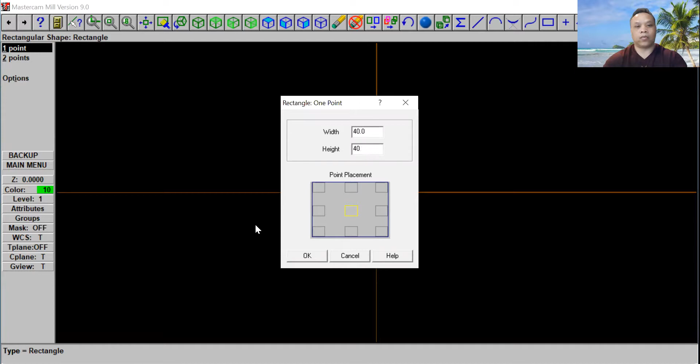We're going to go to origin and click that, then click escape and Alt F1. Put the screen in the middle and go ahead and click F2. Minimize the screen. Now let's go back to main menu.

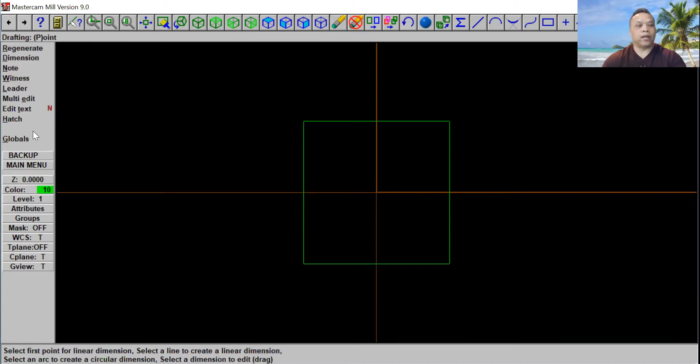Now this time we're going to go ahead and click on create. We're going to click on drafting. Now this is what I'm talking about, the witness. We're going to click on that.

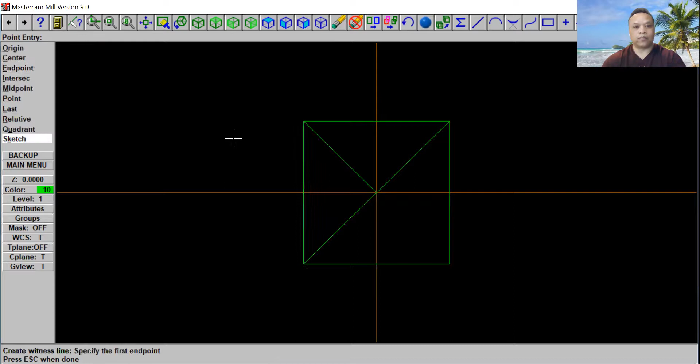Then we're going to go to origin. Click on origin in the middle right here, then click to the endpoint right here. We're going to go back to origin again and click on this endpoint again. Go back and do all four corners. That's 3 and that's 4.

Click escape. Now we're going to use the parallel line, and then we're going to do a box right here, side to side, top and bottom.

Now let's go back to the main menu and go ahead and click on create. This time we're going to use line, click on line, and then we're going to use parallel, and then we're going to use the side distance. So we're going to go ahead and click on side distance.

Go ahead and come over here and click on this line right here, and then you're going to go forward. You're going to go to the right, click on it. I'm going to put 5 inches on there. All 5 inches, all four corners.

Go ahead and click on that. I'm going to click this one right here and click down, click enter again. All 5 inches even out. From this line right here, go to the left and click enter.

Now, if you have a different side that you want to make, you go ahead and put a different dimension there. But for right now, I'm going to use 5 inches all around. So I'm going to click right here and go up 5 inches. I'm going to click enter. Now I'm going to click escape.

Now we're going to delete some of the lines here. So now we're going to go back to main menu. We're going to click on create. We're going to click on drafting.

We're going to click on right here with this line again. We're going to click on origin. Right here, we're going to connect this line right here to this endpoint. We're going to do that on all four corners again.

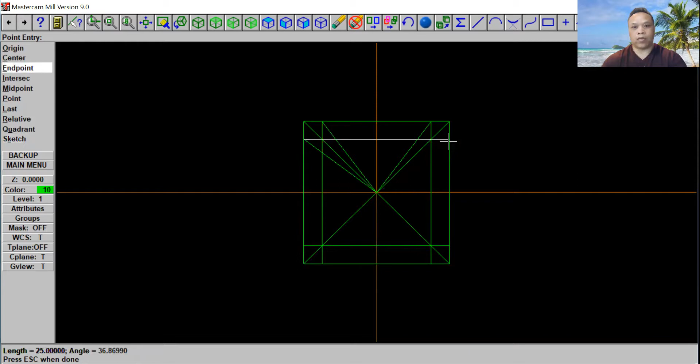Okay guys, this one right here, click to this endpoint, back to origin, and this endpoint here. Again, go back to endpoint, origin, go back to endpoint. Now we got all those lines that we needed.

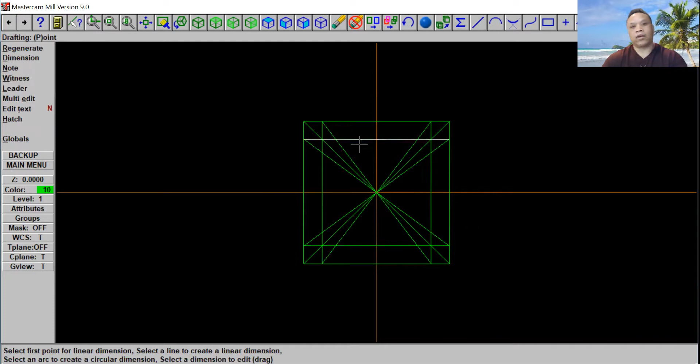Now we're going to get rid of the line. We're going to go here and delete. We're going to delete this line here. Now on this warning right here, it says warning right here. So you want to keep the line that you need, and you want to delete the line you don't need.

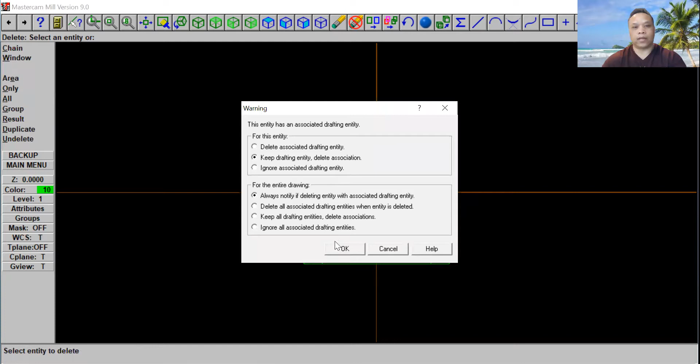Right here it says keep drafting entity and delete association. We're going to click on that, and we're going to click OK. So now I click on delete this line right here, and we're going to click OK. We're going to click delete here, click OK. We're going to delete this middle line here, and this middle line here, and this line here, and click OK.

So then we have all these four directions. Now we're gonna run a pocket through this line right here. But before we do that, we cannot just run a pocket through that. We gotta break this line.

Before we run a pocket, we gotta break the line. Let's go back to main menu, go to Modify, and then we're gonna break the line.

So right here, we're gonna click on draft line. We're gonna break that. Click on that: 1, 2, 3, 4, 5, 6, 7, 8. Now we're all done. Go ahead and click done.

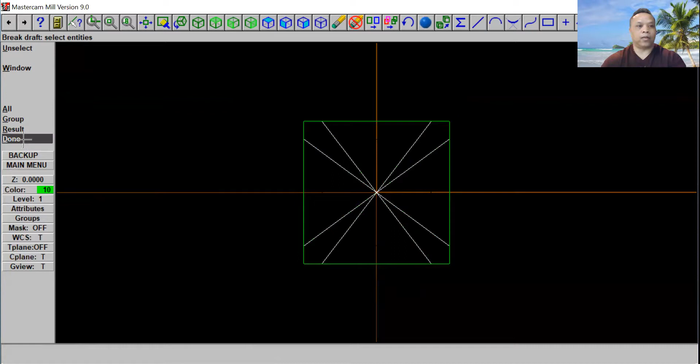Now we're gonna go back to main menu and run a pocket, a tool through this line, this pocket here. Go to Toolpaths, and click on Pocket. We're gonna click right here, inside this right here.

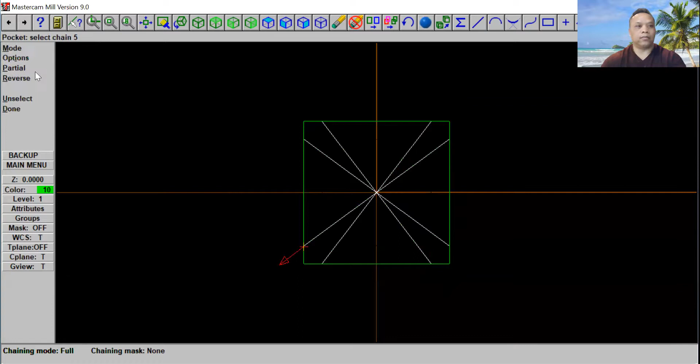1, 2, and then we're gonna click in there, then click reverse. We'll go to the next one, from inside here, 1, 2, click in there, reverse, click right here, inside, 2, in there, and reverse. One right here, second one right here, click in here, and click reverse. Okay, then click done.

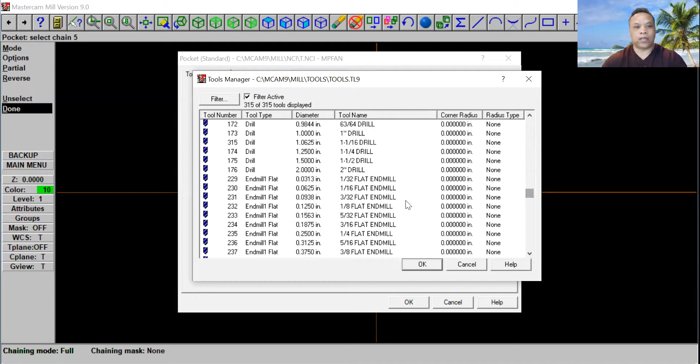Now this is our tool library. Let's right click and get a tool from our tool library. This time we're gonna use a 1/4 inch flat end mill. Let's scroll down to tool number 235, find that tool number. It's right here, 235, a 1/4 inch flat end mill. Go ahead and click OK.

Now we're gonna change the feed rate, plunge rate, and retracted rate. The tool number right here is stated, tool number 1, tool name, and diameter. So we're gonna change the feed rate to 7.0, plunge rate to 7.0, and retracted rate to 7.0.

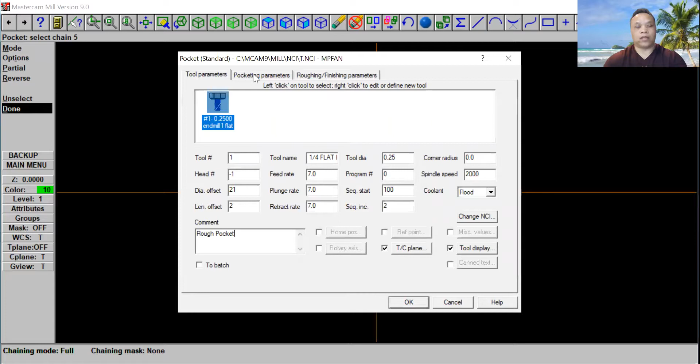Rough pocket. Then we're gonna go to the top and click pocketing parameter. We'll make a check mark on the clearance 2.0. At the top of stock, we're running 3/4 inch material, so go ahead and put 0.75. Then the depth, we're gonna go 1/2 inch, so put -0.5.

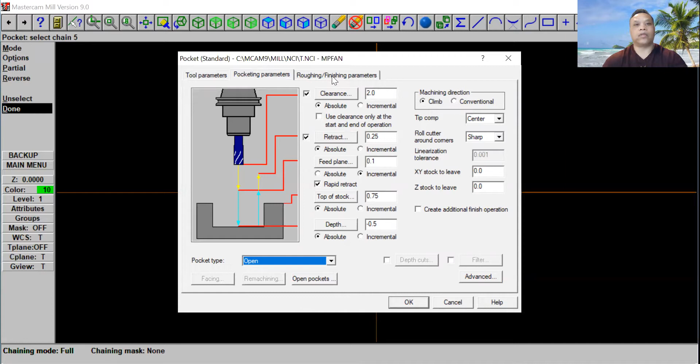Right here on tip comp, we're gonna use center. Then we're gonna use the standard right here, the rough type standard. We're gonna click on open. Then we're gonna go to the top right here, say roughing/finishing parameter, and click on that.

Now this time we're gonna use a different kind of pocket. We have many pockets: 1, 2, 3, 4, 5, 6, 7. Now we're just gonna use parallel spiral for right now. Go ahead and click from inside out. Use that, and then right here, cutter comp, we're gonna use wear. Then click OK.

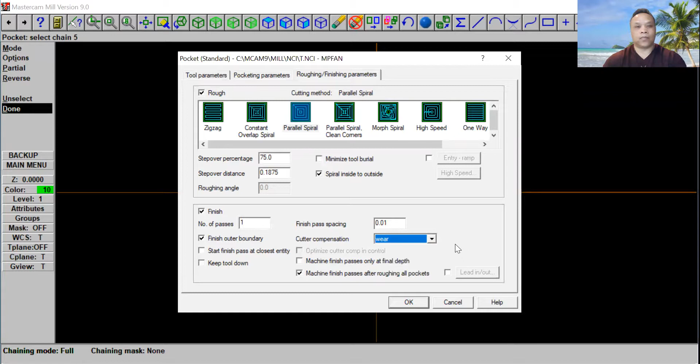That's how it looks. Now let's go to our operation and see how it looks. That's how it looks.

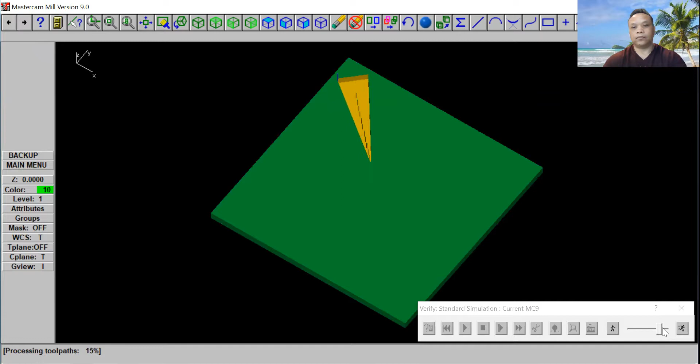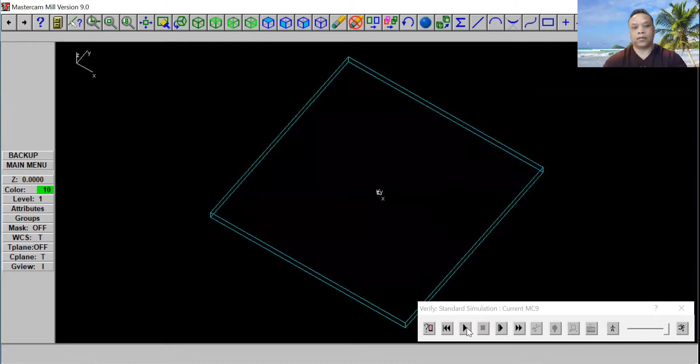Now let's go back, we're gonna change a little bit here and use a different pocket. I'm gonna show you how to do a different pocket. Now we're gonna use zigzag, how different from the previous one. Click OK, go ahead and regenerate path and verify that. See how it's different from zigzag.

Let's minimize this, go ahead and click unzoom. We have that. Okay, before we do anything else, we're gonna go back to the main menu. Now we're gonna cut this part out, so we have 40 by 40, now we're gonna put 50 by 50.

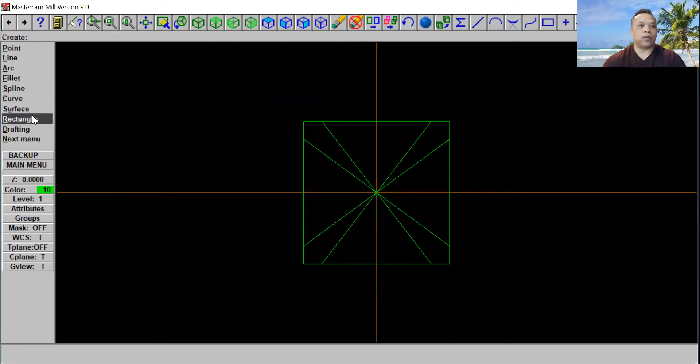Go ahead and click on main menu and create a rectangle. We're gonna use 1 point. Then we're gonna click main menu, create rectangle, use 1 point, and put 50 by 50.

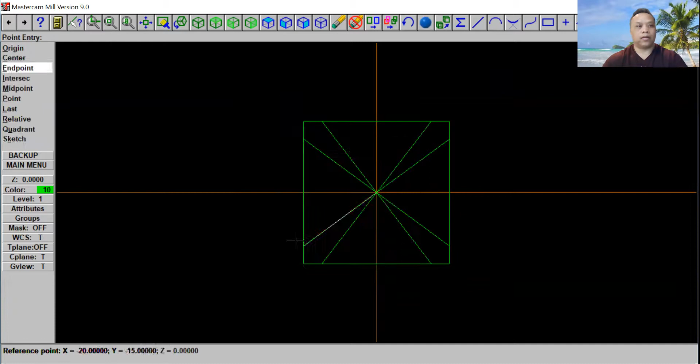Then we're gonna click OK here. And then we're gonna click on origin and click escape. Okay, that's how it looks right here.

So now we're gonna cut this out right here. So we take the whole part out, okay? Okay, we're done with that.

Go ahead and go to toolpath, then click on contour, and we're gonna cut right here, okay? And click done. This is our tool library. I'll go ahead and right click, get a tool from our library.

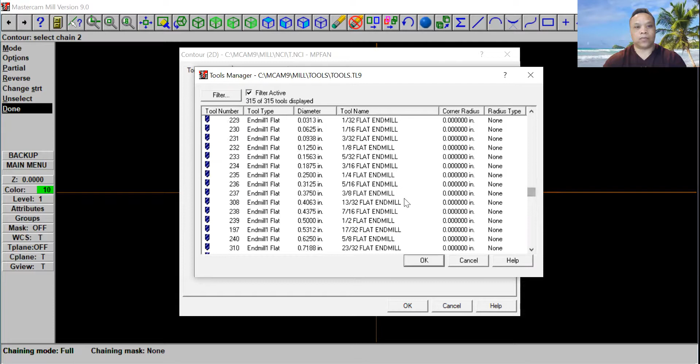Go ahead and scroll down to 239. That's what our tool number is. And we're going to use a 1/2 inch flat end mill. Okay, right here, 239, 1/2 inch flat end mill, and click OK.

Okay, now the feed rate, we're going to go ahead and put 8.0. Plunge rate, also 8.0. And retract rate, also 8.0. And then the spindle speed, we're going to put 2000. Okay, and this right here, we're going to put finish path.

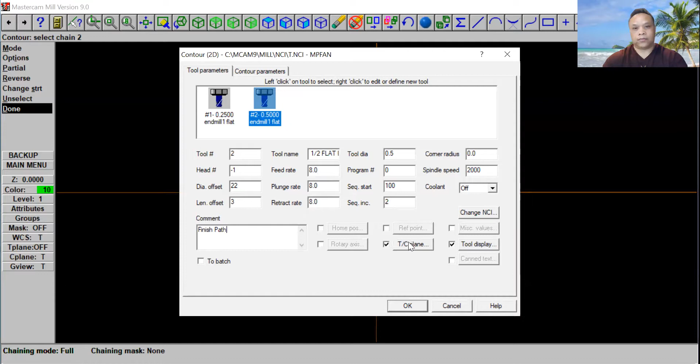And then right here, we're going to click on contour parameter. Go ahead and check mark all of that. And top of stock 0.75. And then the depth, we're going to put a negative 0.75. We want to cut all the way through.

And then right here, we're going to change this right here. We're going to put wear. Okay, and the tip, we're going to put center. Okay, and then we're going to click OK.

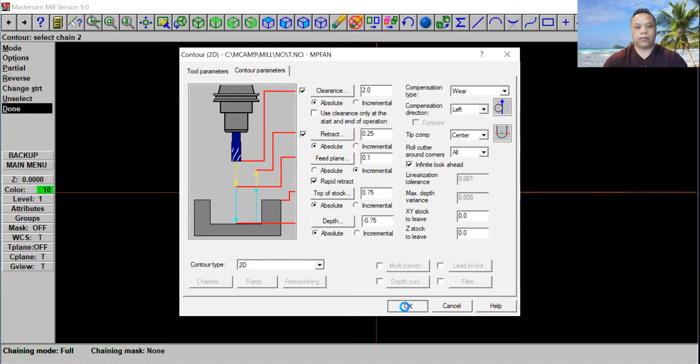That's how it looks. Let's go to operation and see how it looks. Go ahead and select and verify that. And click on start button. That's how it looks, okay.

Now we're gonna go back out. We're gonna see the stock, how much stock we left over. Okay, let's go to job setup. We're gonna put right here 50 by 50.

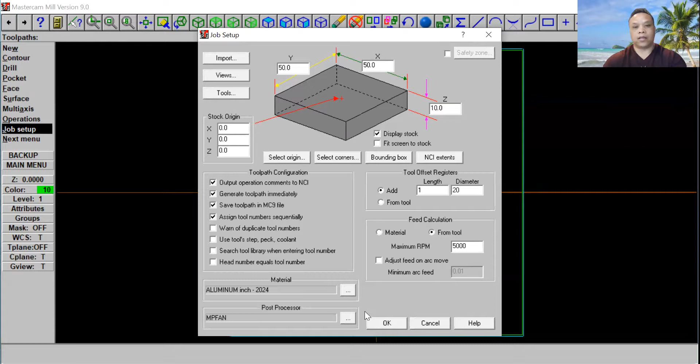And then on the Z we're gonna put 10. Just want to see how it look. Okay, go ahead and put check mark right here, display stock, and go ahead and click OK. Okay, that's how it looks right here.

So now we're gonna view in a different way. Okay, unzoom that. And then we're going to right click right here. Go ahead and go to dynamic spin and click on this line right here. It's how it looks, you want to rotate it and see how it looks. Okay, so that's how it looks, guys.

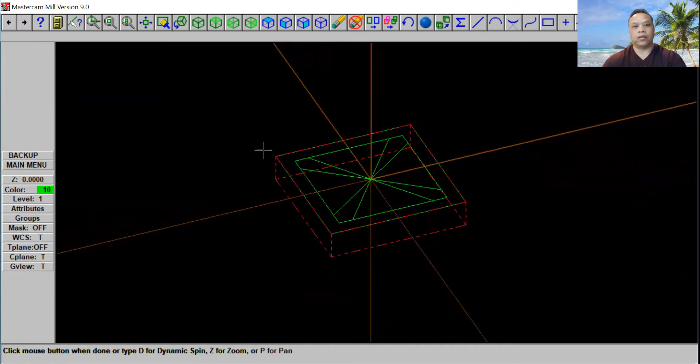Okay, so now we're going to go to operation and select all, verify, and start button. Okay, that's how it looks.

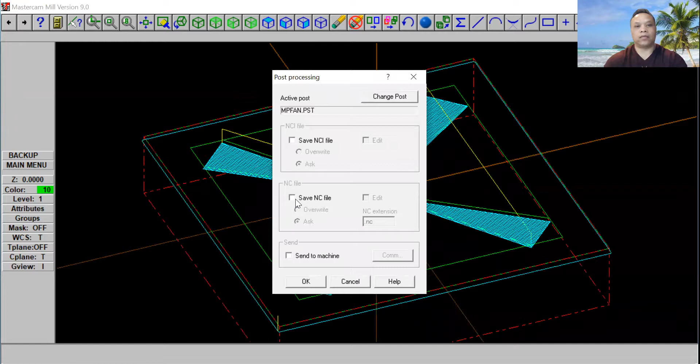Now we're going to post this. Okay, you want to save it and you're going to post it to your machine so you can run it, save it to your file. So to do that, you just go ahead and click post. Then you're going to save right here. You're going to save to NCI and edit. Okay, you click save.

And then right here, you just put program, just put right here, say program 6, program number 6, put 7. Okay, let's say save.

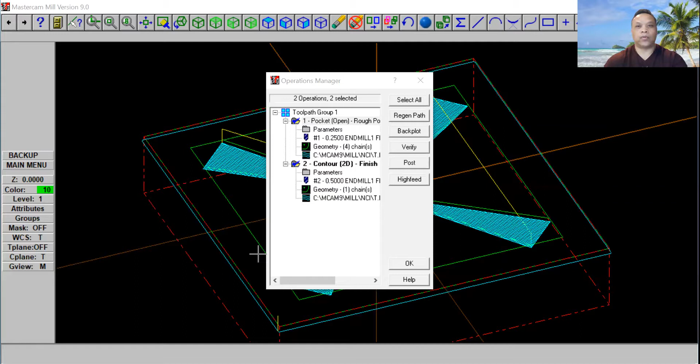Okay, that's how you look at it. Now you can click on expand if you want to see right here. See, okay, now that's on the GM code, okay? So you go ahead and save that already, so which we just did. So I'm gonna exit it out, okay?